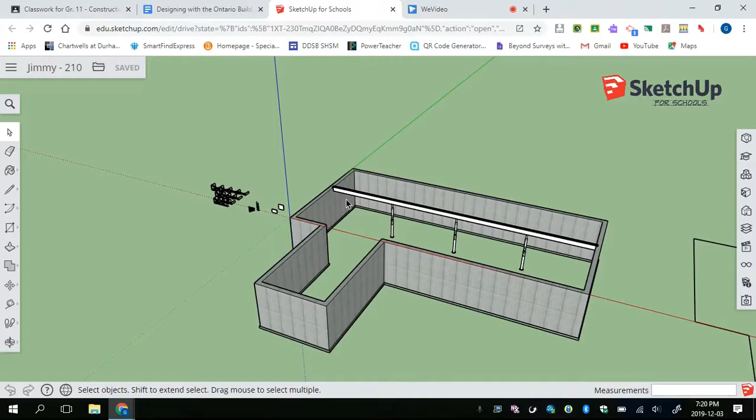We're back. So last time we were here, we did some mathing and some figuring out, and we got the first beam in here in the basement. It was quite a large one. We had 5 pieces of lumber that we had to put together to get our required strength, and then of course we put some posts underneath it so it didn't fall in. So that was a good job, us.

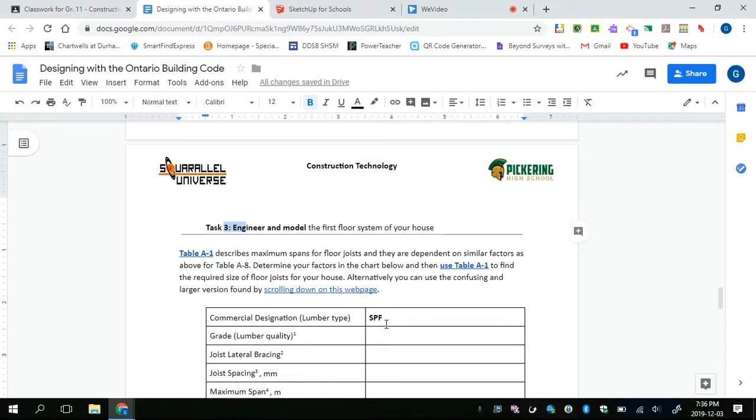The very last thing we did was we put a pocket into the foundation wall, so those beams had something to rest on. Now what we have to focus on is putting a first floor in here. So this task 3 is all about engineering and modeling the first floor in your house. So we're going to fill in this chart similar to how we did in this chart above. And we are going to figure out what size joists and all the good stuff about that.

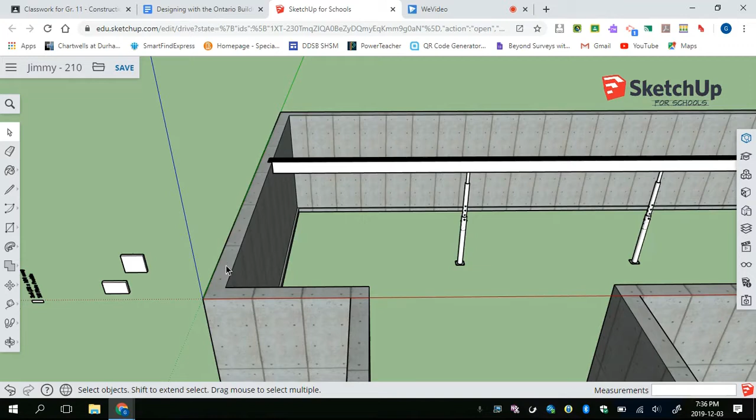Before we do any of that, we need something to put our floor joists on. We can't just set them directly on this concrete. That would be a lot of work and a lot of fastening that we just don't want to do. So we use something called a sill plate, and the sill goes along the edge of all the foundations, and then that makes an easy connection between your floor joists and the foundation. So I have prepared one earlier. Ta-da! It says so right there.

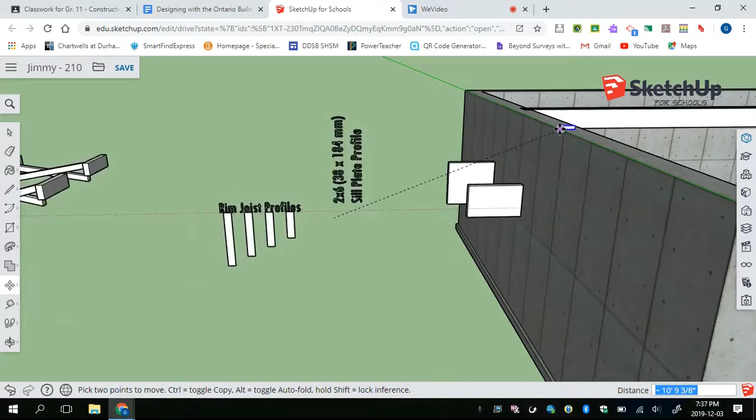And what we're going to do is we're going to take this shape and run it all the way around the edge. So I'm going to just hit the M key to get the move command. Now, if you remember when we drew the outline of this house, we made a couple of copies. And that's what we're going to take advantage of right now. So I'm going to go find my other copies. Yours could be behind or in front, wherever you put them. You should know. And I'm going to put this over on my other copy that I made right there. So it is aligned on the left edge with this shape.

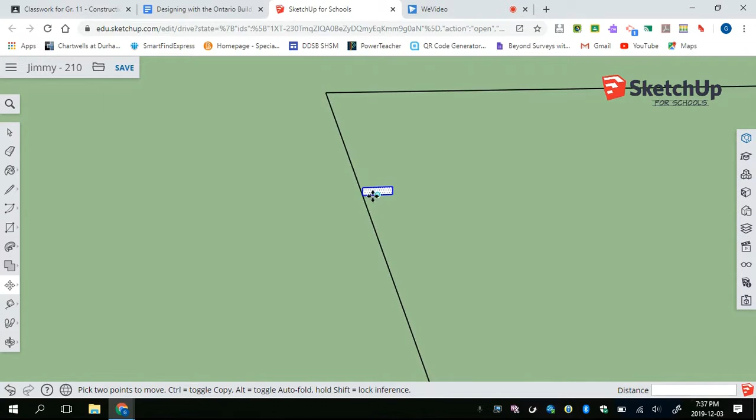Now we're going to use the Follow Me tool. So make sure you have it selected, which is under the push pull tool, and ready to go. So again, the way we're going to do this, we already have this one not as a group. It's in an empty shape, so we can use that. We are going to right click on this, explode it, and now these lines are not a group, but they are all highlighted. We can simply click our tool and click and whammo.

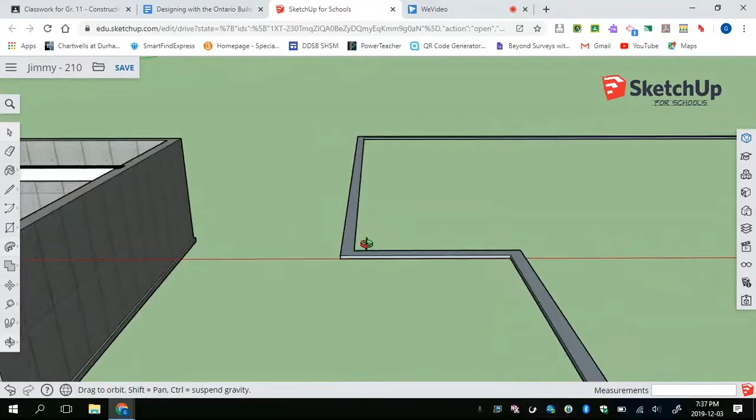Now, this one looks a little different because it's gray, and that just means, well, it's a long story, but if you triple click and then right click, you can reverse the faces. SketchUp uses different shading for different faces, whether it's the front or the back, and apparently it extruded and gave me the back face, so we can just flip that around. Anyways, there we are. We have our sill plate. In real life, of course, this would be multiple pieces cut up and installed, but for us, it's real quick and slick. So we want to make this a group so we can't screw it up easily.

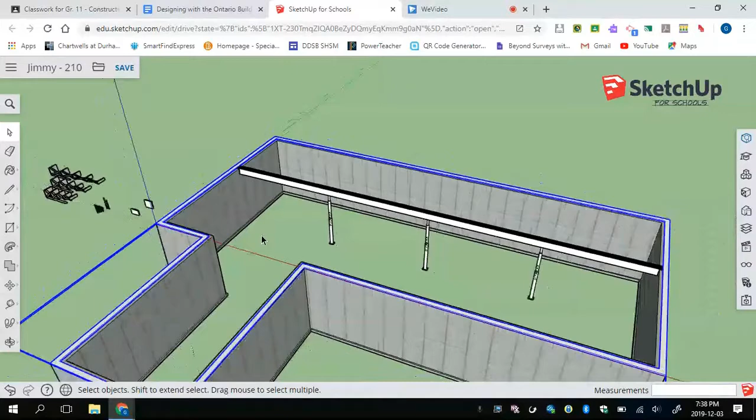We're going to triple click, and then we're going to make a group, and then we're going to put it back on our foundation. So with the move tool, you have to choose somewhere that's going to make sense. I'm going to choose the bottom corner over here, zoom out, and simply bring it right over there. Okay, and now that lines up with all the edges. And there is your sill plate. Congratulations. Give yourself a round of applause, pat on the back, etc. Take a musical break because I've just spotted an issue we're going to have to fix.

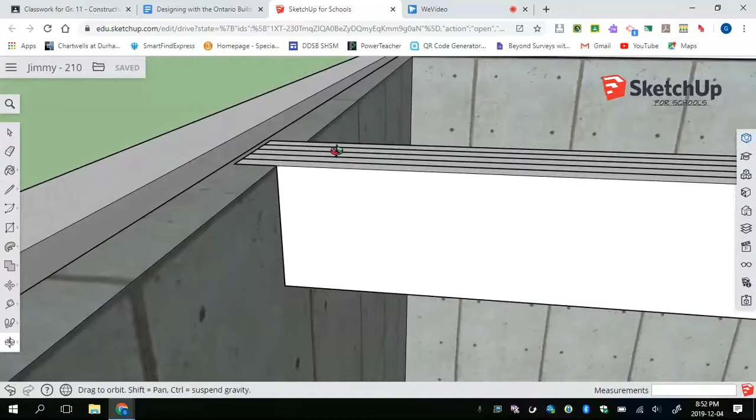Well, changing it now is a lot easier than were this a real actual thing. Here's the issue we're going to have. Our floor joists will sit on this newly minted sill plate, and they, of course, will go from the front of the house to this beam, and likely another floor joist will carry on from there. Unfortunately, currently, the top of this beam is not at the same height as our sill plate, so we should fix that. It's going to be relatively simple to do. What we're going to do, I'll give you an overview here.

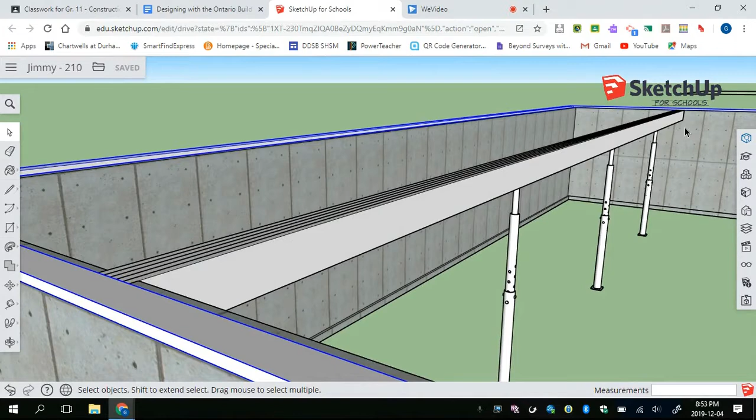We are going to lift that beam up. We will have to lift then these posts up as well, and then that pocket that we made in the foundation, we're just going to have to pull the bottom up to meet it, and everything should be hunky-dory. Record time. Here we go. Let's pick all of the beams.

Now, you may have been playing around a bit and figured out there's a couple ways to select things. Number 1, you can click on something, and that's great. And if you want to click on something else, you can press and hold the Shift, and you'll see beside the mouse that plus or minus comes on and off, and you can click something else. The reason it's plus or minus is that if you click the same thing again, it will unselect

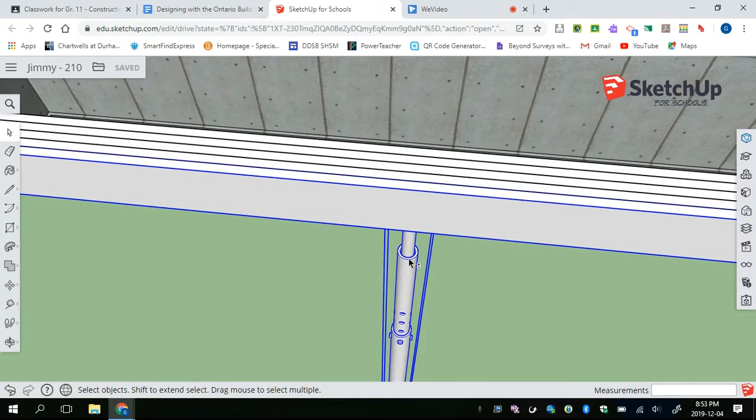it. The other option you have is to actually press and hold Control, and you'll notice it's only the plus. So no matter how many times you click on the same thing, you can't unselect it. The other way you can do it is by using something called a selection window, which is left-clicking and dragging a window, and that will select it. There are 2 different ways to do it, similar to many other programs.

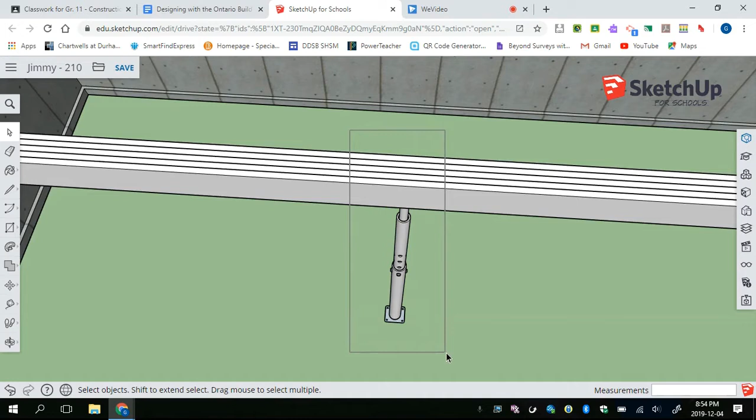If you start in the top left and drag to the bottom right, you will get a window that only selects things that are fully encapsulated by that window. On the other hand, in a situation like this, I don't want to have to click a bunch of times to select all these. I'm going to use a selection window up and to the right, and you'll see that that window is now dashed, and anything that is partially touched by that window will be selected.

So again, if I went top left down to the right, it won't select anything here because there's nothing in the selection window that is fully selected. However, if I come from the bottom up, it will select that. Of course, if you go from the bottom up and you just touch the foundation, it's also going to select that. There we go. We have those beams. Now I'm going to hold Control and select that post and that post and that post. So I've got everything that I want to move selected currently.

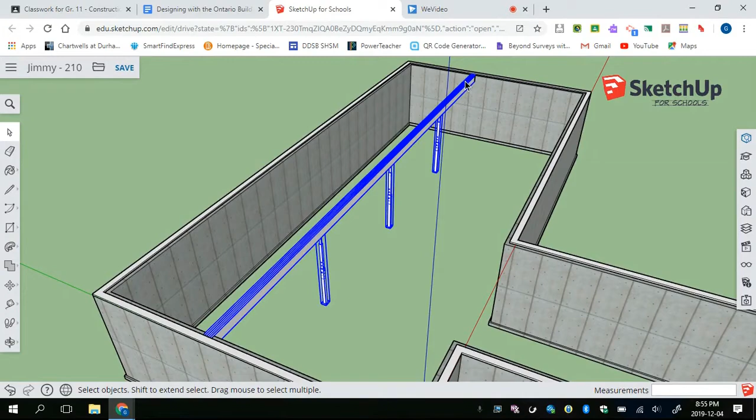What I'm going to do is make everything flush from the top of this beam to the top of the sill. In order to do that, we have to think about what we're going to do. I'm going to select this beam in this top corner and then start moving in the blue axis, hold Shift, and then click somewhere on this face. Here we go. So M for move, click once, start moving it up, and you'll see that it says it's moving on the blue axis, and that's definitely where I want to move it. So I'm going to hold Shift, and now it can only move in the blue axis.

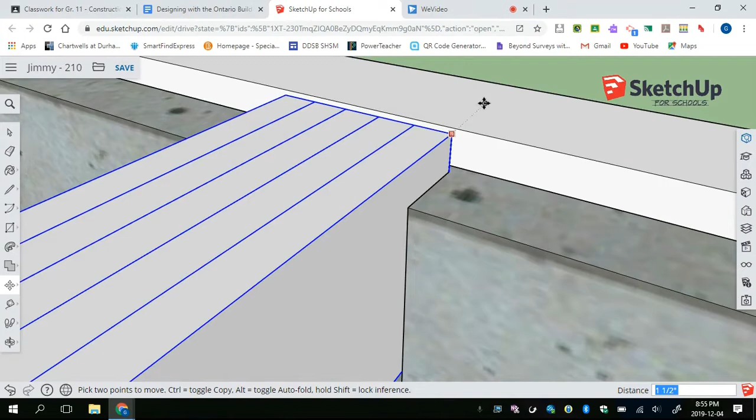And you notice anytime I click anywhere over here or have my mouse over there, it's locked to where that's going to be. And that is indeed where I want to click again. And now that is set. Okay, so that's there. I'm going to fix two things because I don't like what I'm seeing here. Number one, I'm going to go in and edit this foundation pocket. And you'll notice that there's this weird gap here.

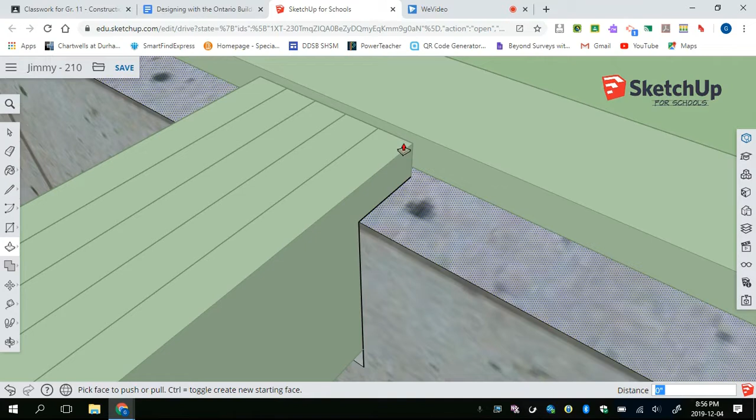I don't like that. So I'm going to click the push-pull tool, which is hidden behind the follow me tool. Alternatively, you can just press P, and I'm going to highlight the face. You can't see that it's highlighted, but trust me, it is. You'll see if I move over, it's going to select the top. So I'm going to select this face, push it back, and I'm going to click on the inside face of the sill. And now, if we look real close, you'll notice that that pocket has moved, which is great.

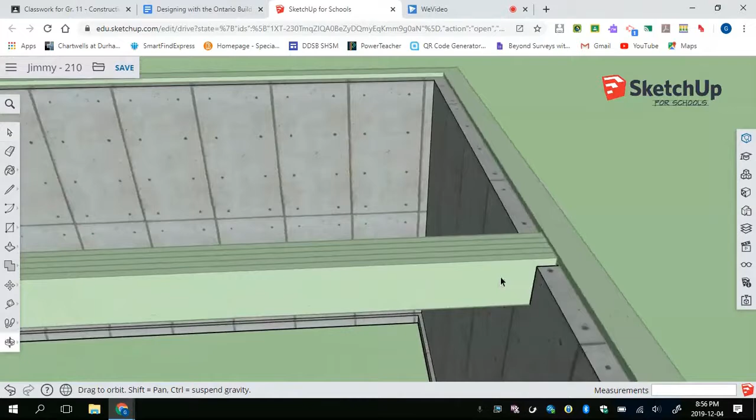And then, of course, because we moved everything up, I'm going to click this face and move it upwards. I only want to go, of course, to the bottom. So I'm going to rotate around till I can see the bottom, click somewhere there, and that is that. The other thing we should do probably is do the same thing to the other side.

So here we are. I'm going to hit P to get that tool, click somewhere here, and move it back to this face. That did not work out. Let's do that one more time. Click, go there, and then there you go. It has to recognize that you're going to click on that face. That looks wonderful. And now I'm going to click on this bottom face and move it up to there.

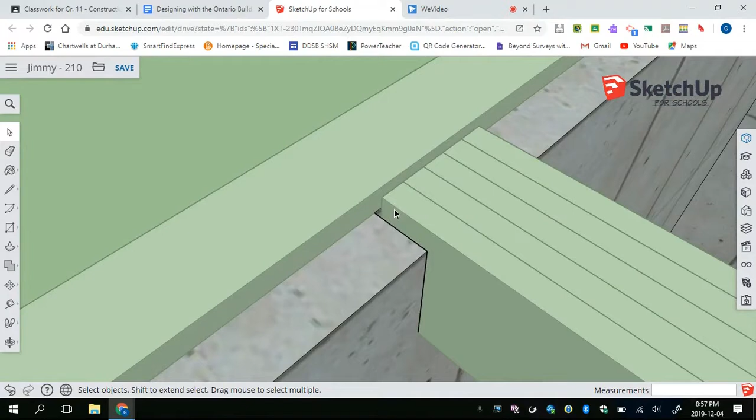So that's wonderful. However, now I have to move all these things. So I'm going to click out of that group. And again, I'm going to use the selection tool to get all those guys, and I'm going to move all of them. So press M, click on that. Make sure I'm going in the right axis. Hold Shift and click under there. So that's making a nice connection.

And now, of course, I have to make it longer. So I'm going to come around this side. And these are components again, so whatever you do to one, it will do to all of them. I'm going to double click on one of them, so now I'm editing it. Hit P and pull that across to the edge there. And that is it. You can click anywhere to get out of that. And now our beam looks like where I thought we were starting.

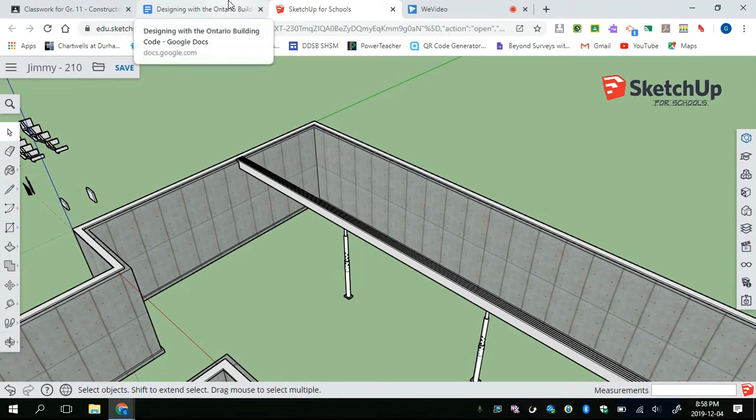Yay. All right. This is where now we have to actually figure out what size our floor joists are. We've started from the ground up. We got this beam in based on a whole bunch of things. And now we have to figure out what size floor joists we need for this particular situation. And yours is going to be different, but I'll show you the way this one works out. This is talking about the first floor and a different table. We're going to use table A1, and if you click on that, it should take you to the table.

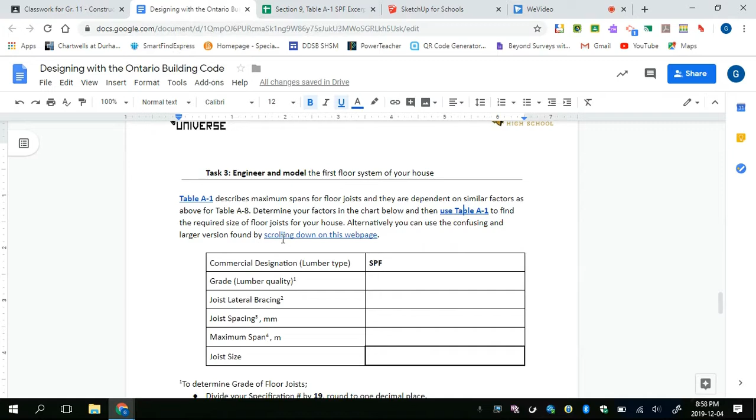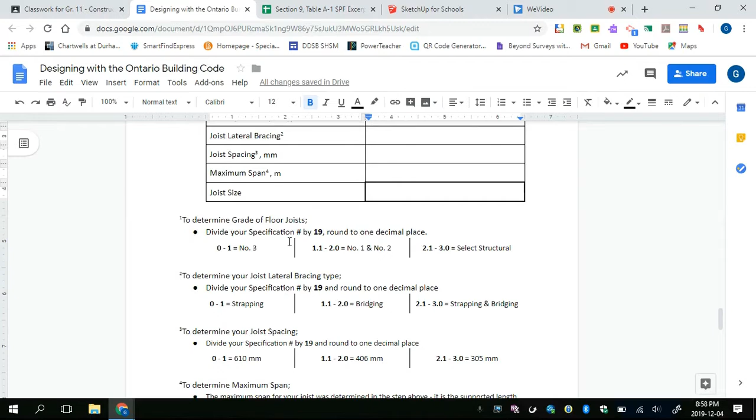And it looks similar to the other one, but there's a couple different sections, and everything is based on 3 options, which we're going to go through right now. So you're given that it's SPF, and the rest of these you have to figure out. I'm going to make up my specification number, which I'm going to say is 55, which is the biggest one. So if your number is 55, congratulations, we're going to do the math for you. The first thing you're going to do is figure out which grade you're using, which can be different from the beam that we did earlier.

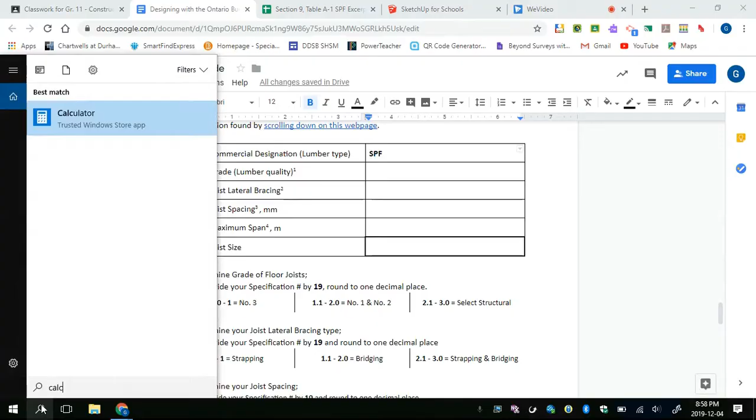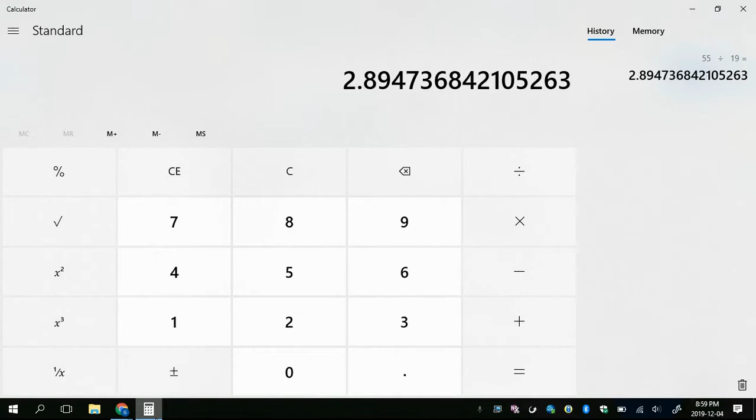So I'm going to pull up my calculator here, and I'm going to take 55, and I think it says divide it by 19. Divide it by 19 equals 2.89. So I'm going to write that down somewhere so I don't forget. 2.89. That's not a measurement, that's just my number. And here we go, 2.89. This says that my lumber grade is here. I am in the select structural group. So I'm going to type that in. Select structural.

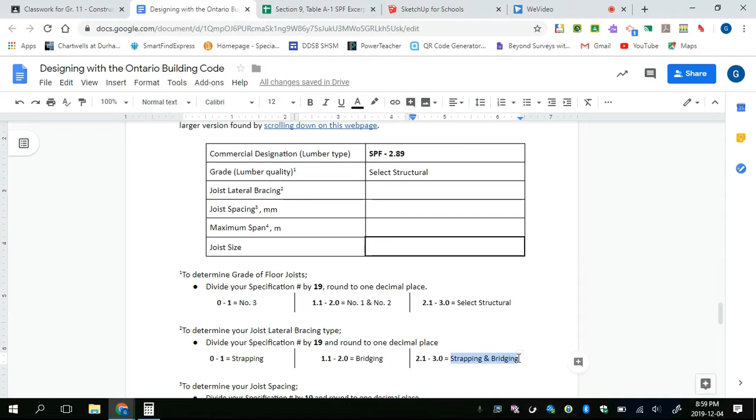And now this other one is about bracing. Now, the bracing changes, and there's a couple different ways we can do it, and they're all sitting over here waiting for you: you have this cross bracing, which is called bridging. There's strapping, which is down here, which we'll talk about in a minute. And then there's a situation where you will use both of these at once. So let's find out what I am dealing with. My number is the same, so it puts me in here, which is strapping and bridging. And I don't want to type, so I'm just going to copy paste. Fantastic. It's centered, but who cares?

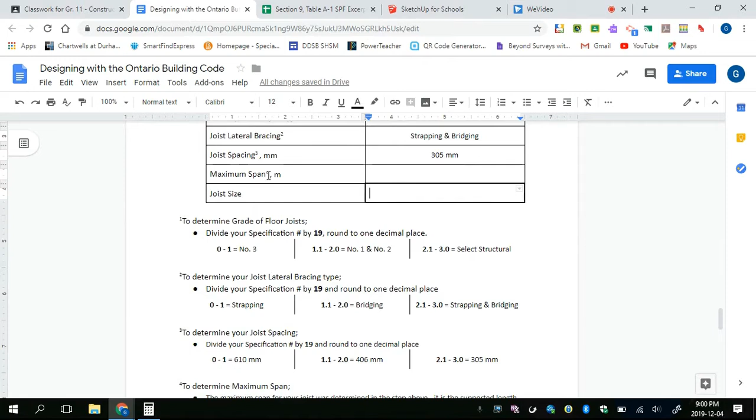Finally, we got to figure out what joist spacing, how far apart all the pieces of wood are. And it turns out it's the same thing divided by 19. So the spacing for me is 305 millimeters, which is something in imperial, but who knows? The last thing that I do before we can figure out what joist size we have is figure out what the maximum span is. To determine that, it turns out we've already figured it out. It was the supported length from task 2 up here. So the supported length I don't have written down, which is awesome. So I'm going to make one up.

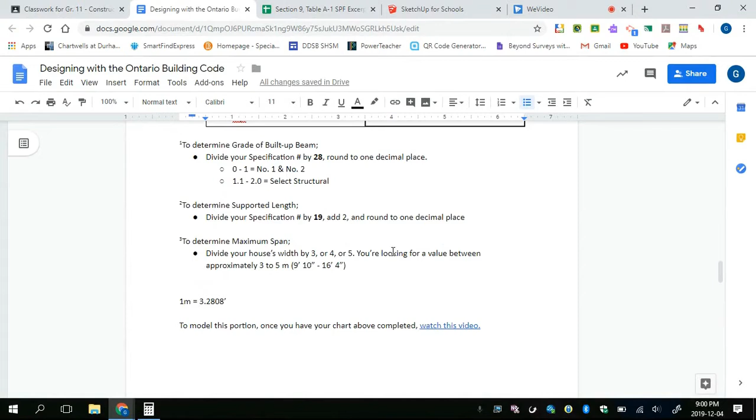Actually, I think it was 4.1 meters. I could be wrong, but that's what I'm going with. 4.1 meters. So I will type that in right here. 4.1 meters. And of course, you will have this written down already from something else. So we have all the things we need, and now we can go figure out what our joist size is.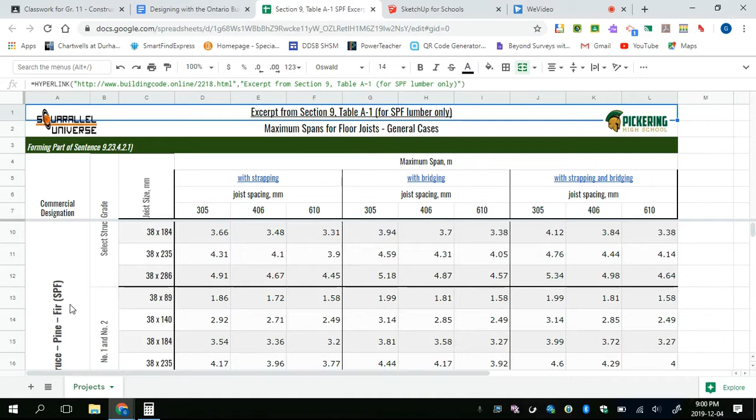So let's look at our chart. Here we are. Moving from the left, we have SPF. That's great. Got to figure out which grade we are. I remember we were select structural, so we will be somewhere in this part of the chart at the top third. If we go back into here, this tells us we have strapping and bridging. So that puts us not in there, but rather over here on the right. So we're going to be now between J, K and L. And our joist spacing is 305 millimeters, which puts us into this column.

So we're in J. And finally, the number we're looking for to support the span that we have for these joists is 4.1 meters. So I'm going to live right here. That's it. So 4.1 is below this, which is great. I could do this one down here, but that's going to be overkill. So this is what I'm shooting for. And all you're going to do once you figure out which box you are, go all the way to the left, follow to the left. And this is our joist size, 38 by 184. And again, we have joist strapping and bridging and 305 spacing.

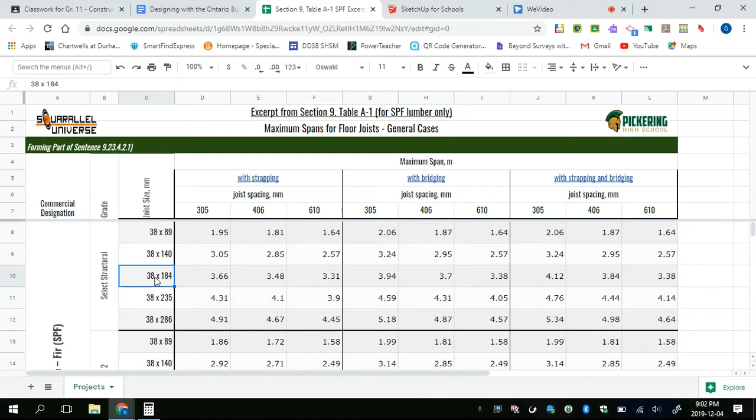So with all that in mind, I'm just going to Control C and go back in here and Control V. There's all my information to draw. So first, let's find the joist size. It is under the entity info. It's not that one. It is this one. It's a 2x8, 38 by 184. Just double check that I got that right. I did. And it has strapping and bridging. So we're going to use both these things. And you'll notice these are grouped and they say what they are. And this is 2x8, which is what that is. And the spacing is correct at 305.

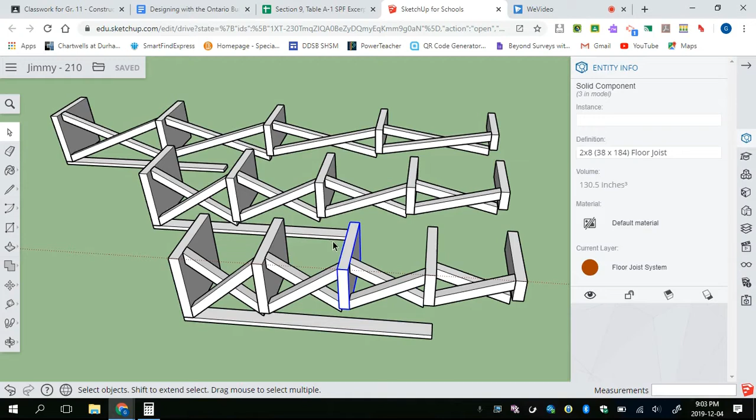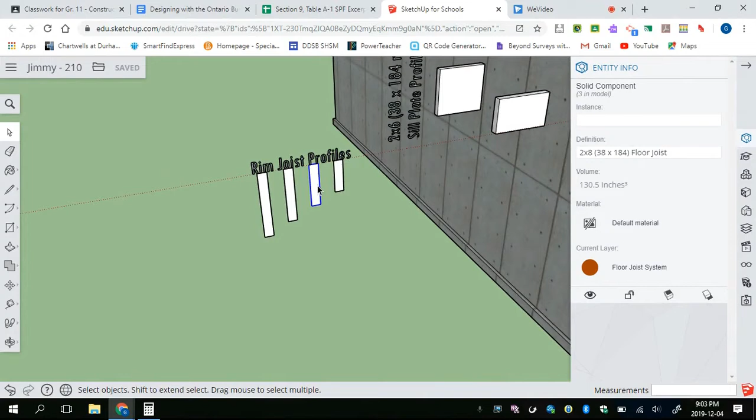You'll notice that there's these little guys sitting here. This is something called the rim joist, and our floor joists are going to sit on the sill plate that we talked about earlier. However, they need something on the end to fasten to, and that is, you got it, something called the rim joist. So this one here is 38 by 184. So I'm going to use that one.

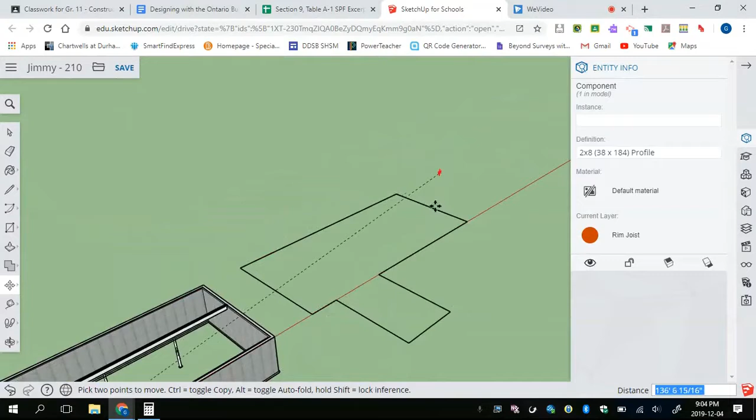And again, I'm going to use the follow me tool, which you probably guessed, on the final outline that we have. So to make this easier, I'm going to bring this over here, put it there, and I'm going to grab my profile and move it. And again, I know where I'm going to put it. It's got to go on top of everything. So I'm going to grab the bottom, move it along, and plop it anywhere I want over here on that line. So one last time, get your follow me tool and then get rid of it, oddly, but that's just how it works.

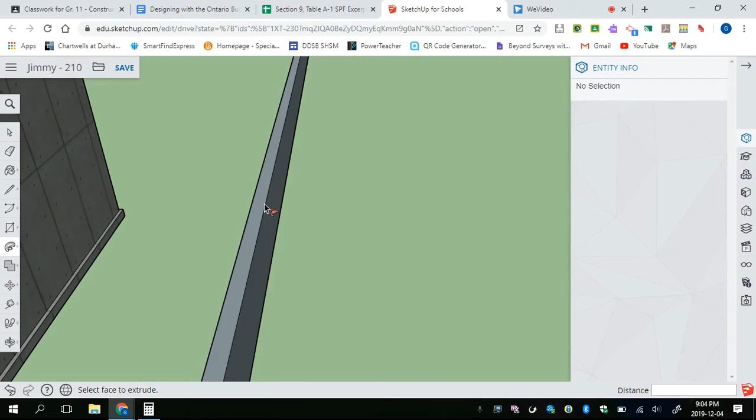This is a group in this case. It's not separate like it was for the sill plate. So I'm going to right click and explode. I'm going to right click the outline and explode, and everything's highlighted, but it's not a group. So everything's going to be peachy keen. Grab that tool, hit it once, and voila. Again, I've got the rear faces apparently. So triple click and reverse the faces and right click and make a group. So now I can grab this from this corner or whichever corner you like. And I'm going to dump it on top of here where it belongs, which is right lined up there. So now it's starting to come together.

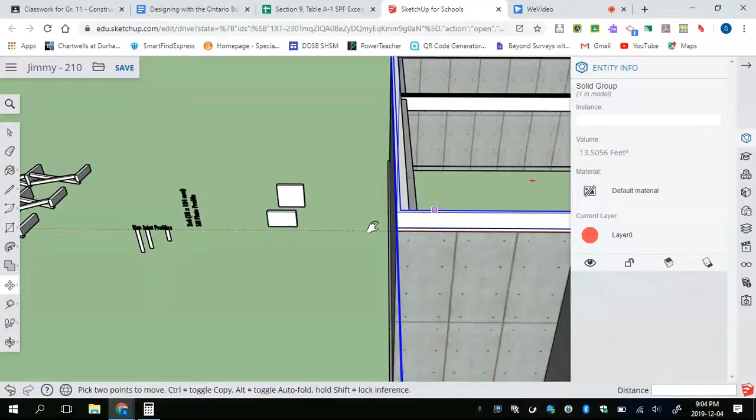We have our sill plate, we have a rim joist that sits on that, and now we can start filling in our joists. So I'm going to grab that joist, which is this guy. Nope, it's this guy. That's good. I'm going to get rid of this, and I'm going to grab this, and I'm going to grab this, and I'm going to go install the first one.

I think what I'm going to do is take it from this edge, and that'll become clear why in a minute, and pull it way over. I'm going to start in this corner, which is where we're going to start. And I'm going to select that anywhere here. It doesn't really matter. And what this does is set the right height. So the reason I've selected it there is I wanted to put it flush to the top here. I have my strapping down here, and I have my floor joist.

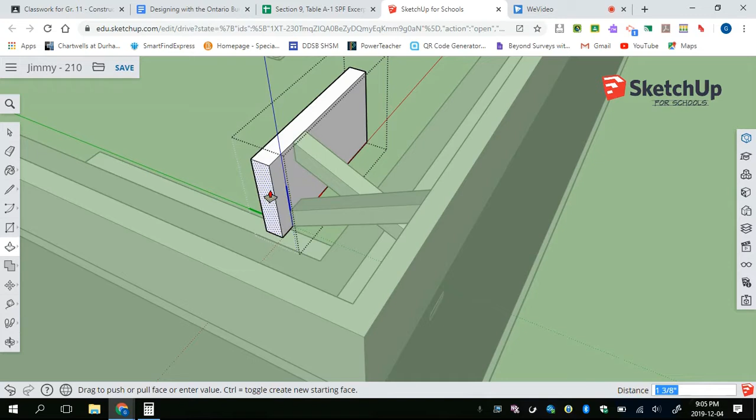So let's do this. First thing I'm going to do is double click on this, and I'm going to get the push pull tool by pressing P, and I'm going to pull this into this face. Now, when you have the push pull, it can only extrude in the direction that the face is going. So it's kind of like holding shift, but you don't have to. I'm going to go way over here and just click on that point because that is where I want it to end. And then I'm going to pull it to the middle of our beams.

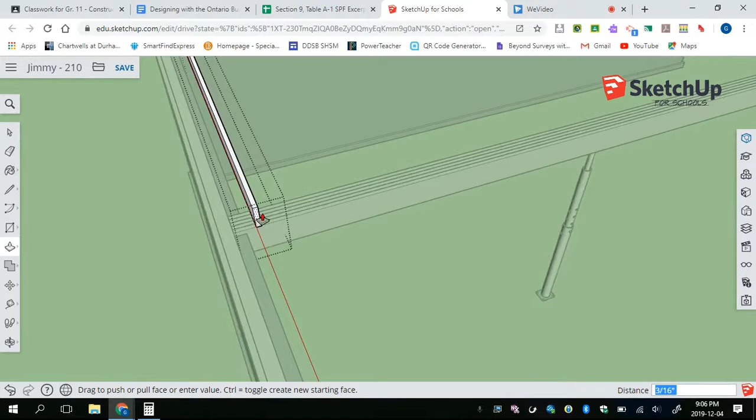So grab it there, and well, you know what, just for our purposes, how about there? We're not going to draw the whole thing. We're only going to get a sense of this. I'm not going to continue that on. You know what? I'm lying. I'm going to continue this all the way through, which you should too if you can. And we're going to click it there and close it.

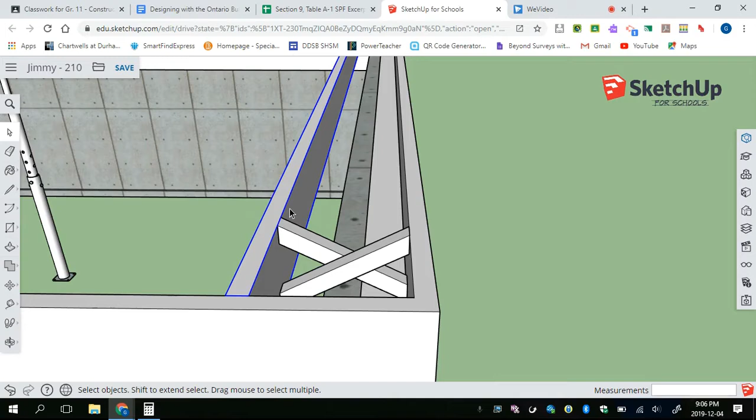So there's our first joist, except I'm kind of lying. I don't want this spacing that I've already got set. I actually want it 3/4 of an inch less. The reason for that is plywood. If we continue with this spacing, when we got plywood on, it's going to end on the inside edge, which we'll show you in a minute. So you know what? I'm going to leave it as such for now. Let's go with that. So there it is. We have our correct spacing.

I'm going to take this group of bridging, and I'm going to move it to the middle, which is going to be really difficult because I made this thing full length. I'm making my life difficult. So to do this, I'm just going to pull this back to the middle of my beam. There we go, close enough.

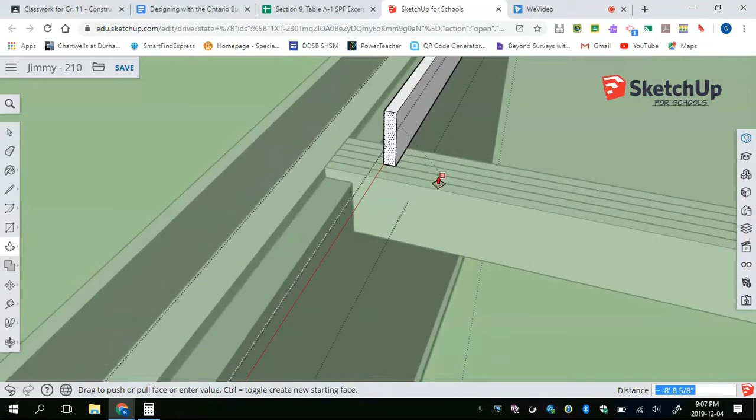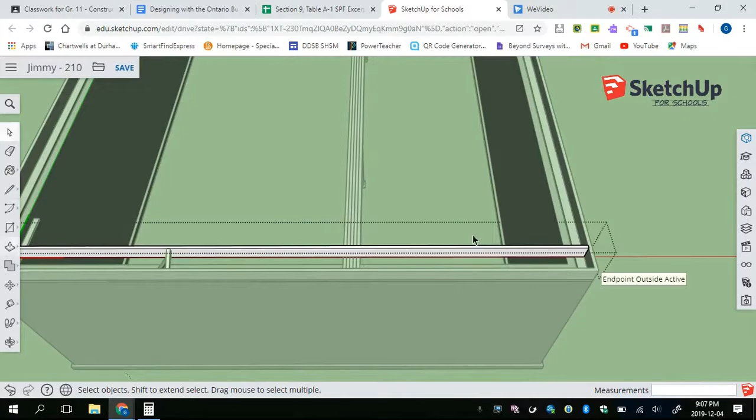And now what I can do when I get this bridging is I can grab this, and it will click to the middle. So if I move along here slowly, at some point it's going to say, hey, that's the midpoint. So that's where I want it. And now I'm going to go back and do this. Okay. So now we have the whole thing. So there's my floor joist with a bit of bridging. And now I need strapping, which also has to go to the middle. And strapping is just a flat piece of wood that gets connected to the bottom of the joists.

So this is kind of in the middle of nowhere right now. And I'm going to install in a couple steps. Number one, I'm going to grab the bottom in the middle, and I'm going to move it this way to line it up left to right. And I can just go to the, oh, I can't go to the middle because I just made it bigger. So get into the green axis, hold shift, and I will line it up maybe with that point. Fantastic. And then I need to move it up.

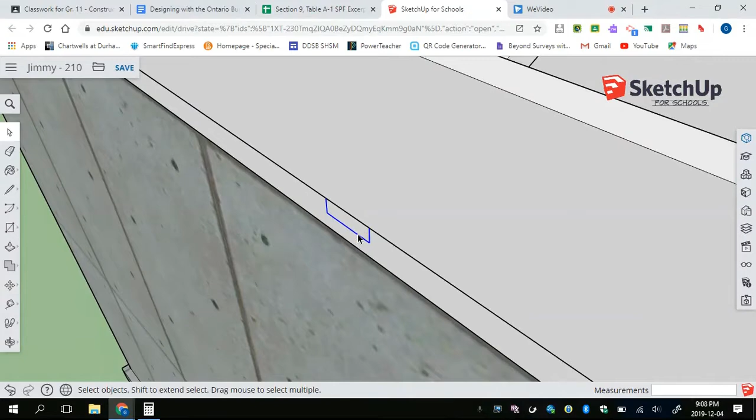So I'm going to grab the top of this, go up in the blue axis, and then click on this face. And there it is. Oops, sorry about that. And finally, you can see that it's sticking out way over to there. So I'm going to move this now left to right. I'm going to get it going the right direction, hold shift, and I'll bring it, sorry, let's get this again, shift to there. Okay, there's the beginning of my strapping.

So this joist in real life would be split here, and you get a second one going. For our purposes, don't worry about it. And now I'm going to make this longer because I'll need it all the way across. If I could select it, that is.

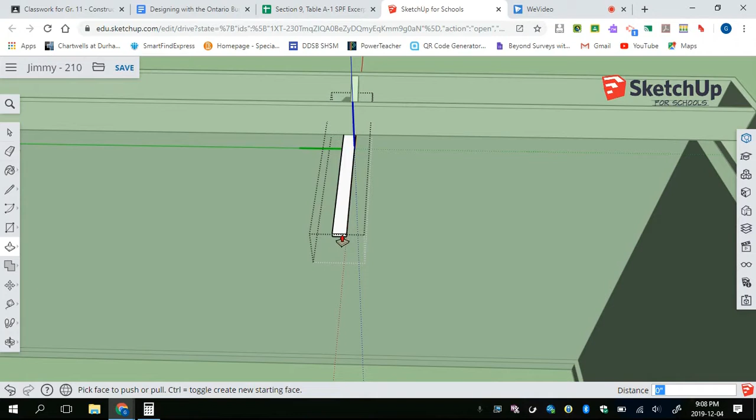And I'm going to pull it all the way over. Sorry if I'm making you dizzy. And let's go right to there. That's good. And then I can take my joist and my bridging, and I can move both of them at once. So what I will do again is click on this.

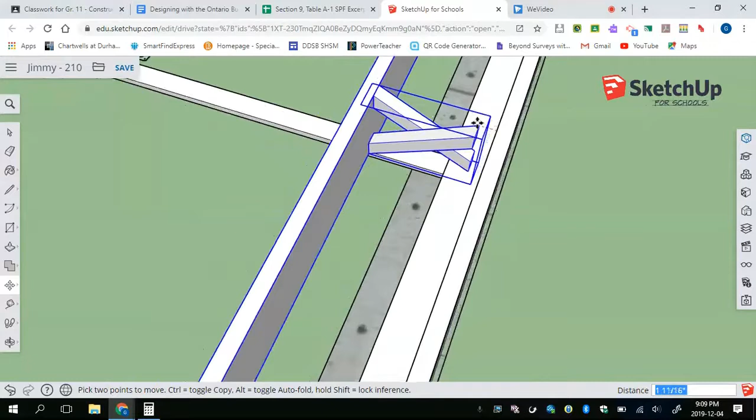So press M, click on that, start moving it. And of course, I want to keep that one there. So once I get going, I'll press Control, which will give me a copy. And I'm going to hold Shift to make sure I'm going in the right direction. And I can click on this face, which it is clicking on there, but I'm actually going to rotate around so I can see it, get in the red direction, hold Shift, and click on that face.

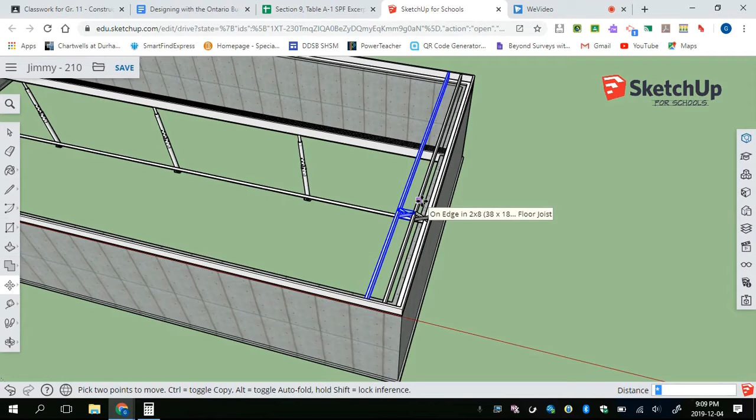So there it is. Now, if we haven't hit space or done anything, we can continue on our copy like we did when we made the outline. So what I'm going to do is hit Shift 8 to type in multiply by, and I'm going to type in, I don't know, 10. And there's that many, and I'm not there. So I'm going to now type in times 20, and I'm just making up numbers now. I need more, so I'll go 30 maybe.

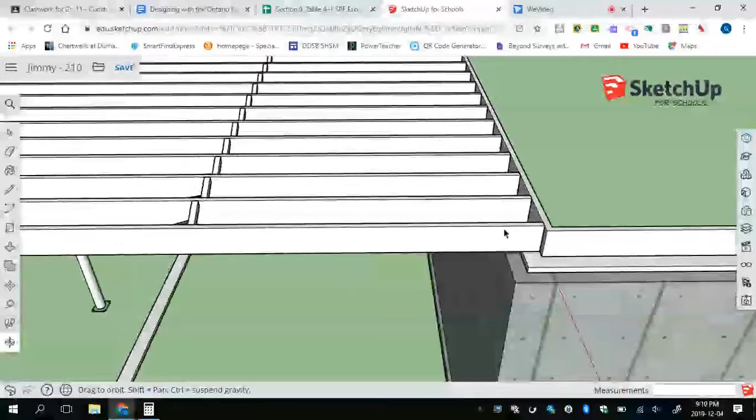Oh, that's really good. So I don't want to play with what's in here. And similarly, for your situation, you don't need to draw them all in. I just want you to get a sense of what they would look like. So here we are. There's a whole bunch of joists and a whole bunch of strapping and a whole bunch of bridging for that section.

That looks terrific. The next stage I want you to do, actually, you know what? That was a really good job, everybody. You've done great. I love the way your joists look. Take a break, and when we come back, we're going to install plywood and find out why this is all wrong and you have to change it, okay? We'll see you then.

It's not that I lied per se, it's just that, well, sometimes when you make a mistake, you remember stuff more, and let's just proceed as though we're still buddies, okay?

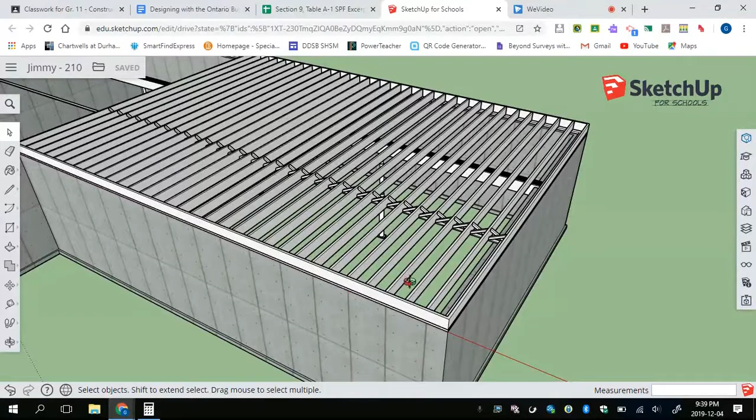Here's what we got to do. We have to install plywood on this floor because I don't know about you, but I don't want to be walking around on this floor as it sits currently. So we're going to draw a sheet of plywood. Now, sheets of plywood, as you may or may not understand, are 8 feet long by 4 feet wide. So what we're going to do is draw a rectangle that is 8 feet long and 4 feet wide, and then we're going to push pull and extrude that up 3/4 of an inch.

So R for rectangle. Let's start in this corner and pull it along here somewhere. And you'll see in the bottom corner, it's just guessing at a size. It says it's 5 foot by 2 foot 4 and 9/16, give or take. We want that to be 8 feet. So 8 feet, comma, 4 feet. And that should give us our piece of plywood.

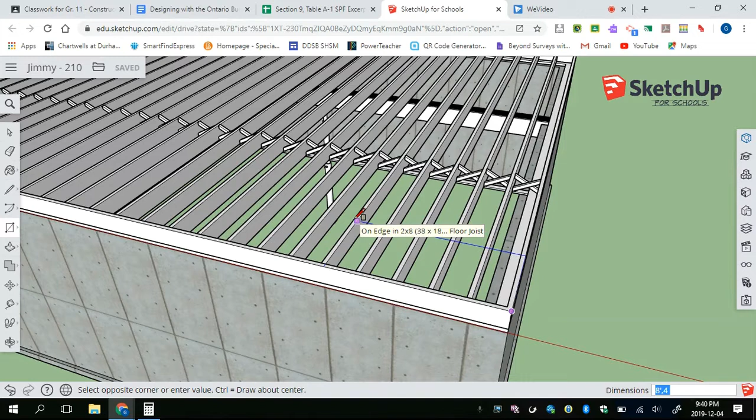We're going to press P and we're going to pull that up 3/4 of an inch. So 0.75. And there we are. And hit space. And now we're all set. And I'm going to make this a group so I don't change it too easily. There we are. There's our sheet of plywood. You can see it lines up nicely on that edge, and it lines up nicely on the front edge, and everything is just really handy dandy.

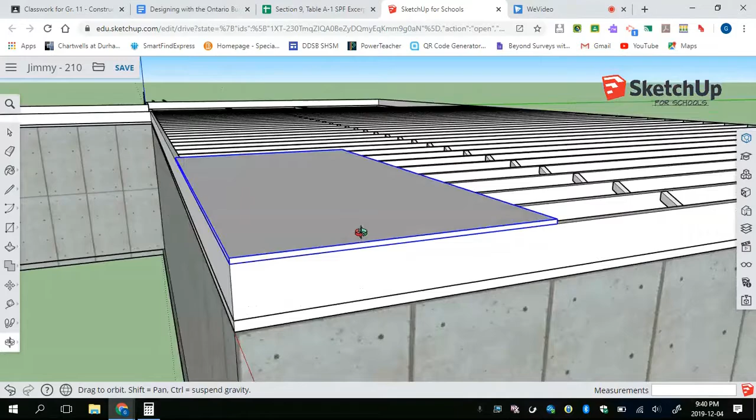However, if I turn this around, what you're going to see is that the plywood is, well, it's really not doing so hot over here. So let's pretend that you're hanging out with your buddies and someone steps right here. Okay? In fact, hold on a second. I'm going to get a buddy.

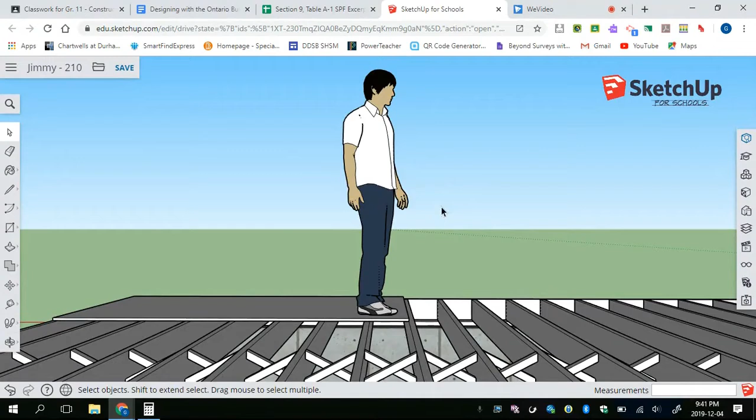So I got a buddy. Here he is. And turns out this guy's name is, well, it's People. So anyways, his name is People. Let's get rid of you. And when my buddy comes over and he stands right, oops, sorry about that. When he stands right at the edge here, you'll notice that this plywood, which is 8 feet long, which is standard, isn't physically reaching the edge of this joist.

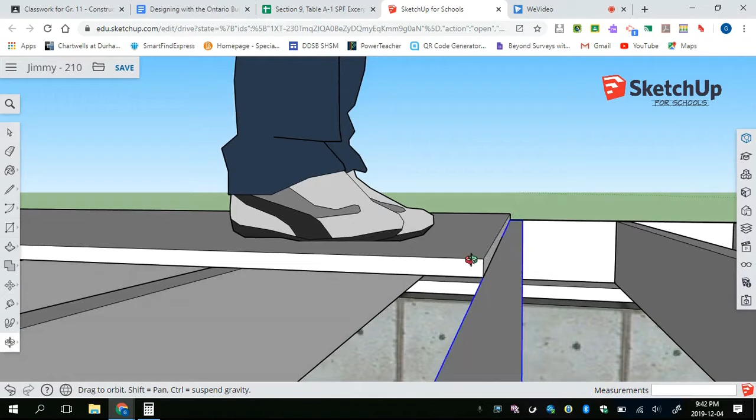So when he steps here, let's pretend this is a tile floor, all of a sudden there's a whole bunch of flex in this floor, and now your tiles crack or the mortar does. All kinds of bad stuff can happen. So this is generally not a good way to do it, to leave the joint between this and the next sheet of plywood unsupported. So it's currently not sitting on anything.

If you were working here and your boss said, hey, could you please screw in this flooring? When you went to go put a screw through here, there's literally nothing to fasten to. So this is just bad news bears. And that is why using this spacing at 305 millimeters right off the bat is a problem. You can't ever do that.

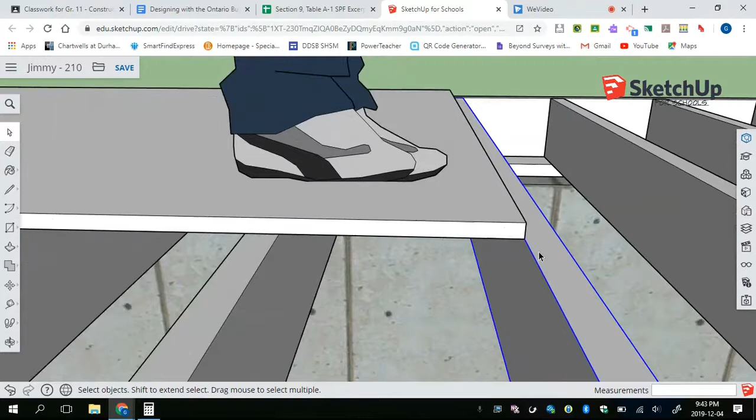So what we want to do is make sure that this sheet of plywood, we can't order different size plywood. That just doesn't happen. And we don't also want to cut the very first one. So here's the solution. We're going to move this guy over until it's in the middle. Seems easy enough. So here's what I'm going to do. I'm going to say goodbye to People. He's gone. And what we want to do is move all these joists over half their thickness. These guys are 1.5 inches thick, so we're going to move everything 3/4.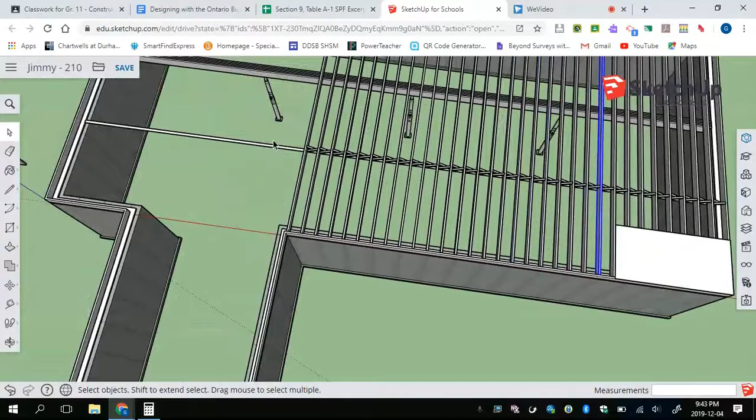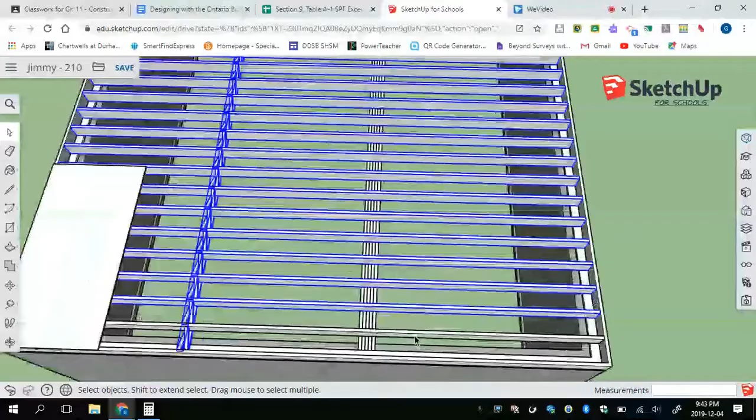And now what we have to do is select a whole bunch of stuff. So here's what I'm going to do. I'm going to select that guy. I'm going to zoom out, and I'm going to grab all my bridging right now. So I'm going to hold Control, and I'm going to select all of that. That looks great. And then I'm going to turn myself around some more, get to where I can see everything, hold Control again. And I'm going to start right here and drag upwards. And I've got all those. And finally, that guy. So again, hold Control and click it one more time. And that is everything that I've drawn, and that's going to work out for us.

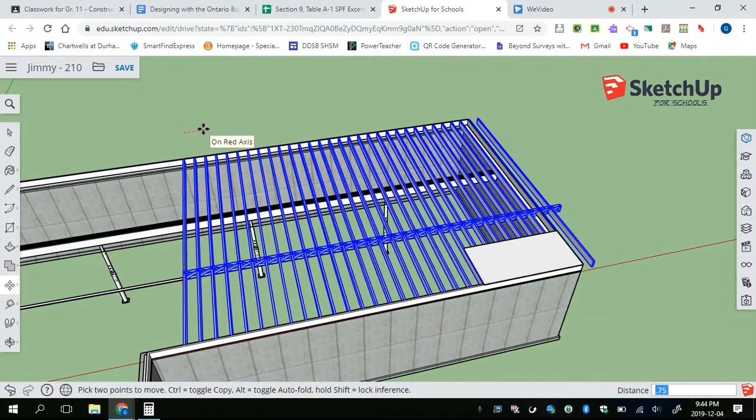So, oh, you know what? I'm lying. I don't want to move this strapping. So I'm going to hold Shift, not Control, and unselect that. And there we go. Press Move, click anywhere at this point, because we know all we're doing is going in the red direction by 0.75 inches. Enter, and all is well. Let's take a look. Oh, I already got rid of People. If People was standing here, People would be much happier with this plywood now because it is fully supported on a floor joist, okay? So that's it.

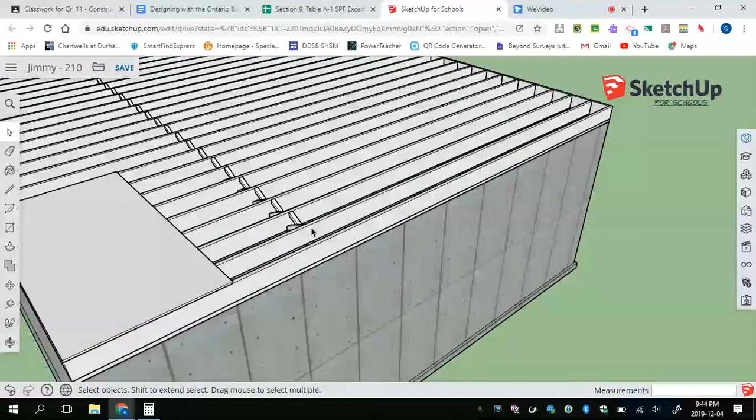Last thing I'm going to do, this obviously didn't go so well. And you know what? For our purposes, just getting rid of it. Don't tell anybody, okay? In real life, you would just cut that down to size, but that's just too much drawing for now. So here we are. We have a piece of plywood that's great. Let's put another one down. And there's no real hard and fast rule for this assignment about how many you have to put down, but I would put down a couple sheets of plywood.

So I'm going to take that over there and kabloomy. Of course, that's just 8 feet. We could have done that. And I want another one, so I'm going to hit Shift 8, which is multiplied by 2. And there's 2 more sheets of plywood. And oops, maybe times 3. Oh, I already pressed space. That's not going to work. Sorry about that. So I'm going to grab this, press M, and move it that way. Toggle Control, and just type in 8 feet. There it is. Now, the next thing we're going to do, I'm going to select these 4. This is like Lego.

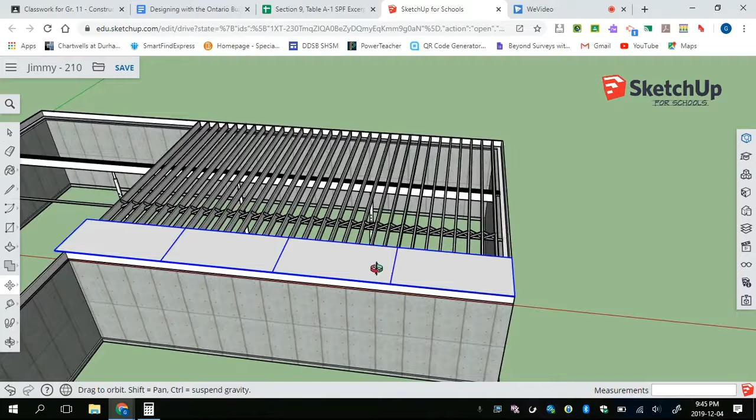So if you ever played with Lego, which you all know you did, what you will know is that if you built a wall and you put all the bricks on top of one another, this is the suckiest wall ever. Your cousins came over and destroyed it easily, and you got upset. It was a whole thing at Thanksgiving that everyone got upset about. So let's not do that. Let's make your wall/floor better.

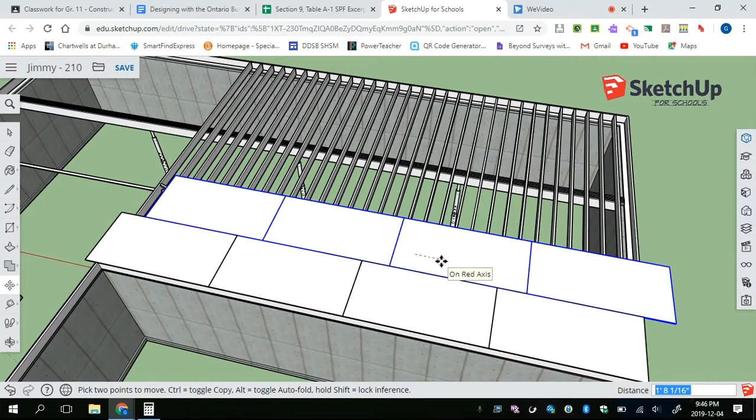And of course, what you're going to do is stagger these joints. And I'm going to stagger them by half, so 48 inches or 4 feet. So I'll type in 4 feet, and now they're staggered. This, of course, is a slight issue we've got going on over here. So I'm just going to delete it and draw a half sheet of plywood.

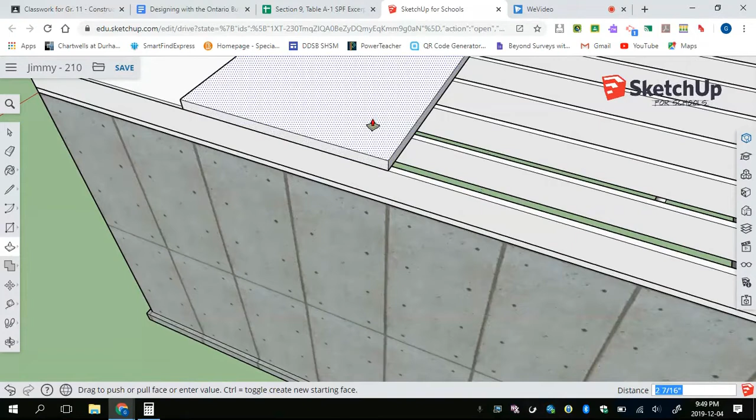So start in this corner, click there, and I'm going to go out to here, and I want it to be 4 feet by 4 feet. And then I will pull that up to 0.75 inches and make it a group. So now we have the beginnings of a plywood floor.

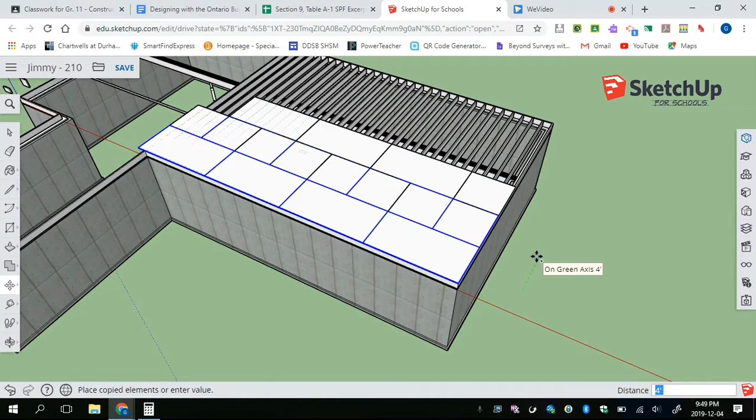And just because I can and it's easy, I'm going to select these and move them in this direction. Oh dear, I didn't get all of them. Press space, do it again. I'm going to move them all in that direction. I'm going to press Control for a copy, and it's 4 plus 4, which is 8 feet. There's some plywood. Look at that. Isn't that wonderful? There it is.

Now, let's just pause for a minute, and I want to talk about this in a bit of a more broad sense. So here's what's happened. Your parents are going away for the weekend, and they say, of course, hey, don't have a party. And you're like, obviously I would never do that. Meanwhile, you're messaging all your buddies. So everyone comes over, and you're having a great time. And then your house falls apart, and everyone is sad. And we don't really want that.

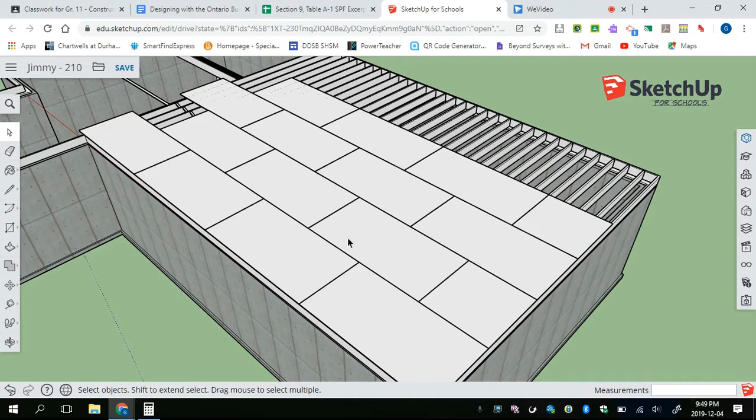So here's what's happened. We have just used the building code, which I have summarized in some of these tables. And based on the design of our houses, we have engineered this whole thing so your house doesn't collapse for your party. And here's what happens. When you have all the people, you know what? Hold on. I'm going to find all of the people.

So I found all the people. Turns out you've got a lot of people at your party. There's a guy walking a dog. There's some kids over here. This guy's legs are going through your floor. It's a whole thing. Anyways, here's your party that you're having, and no one's falling through.

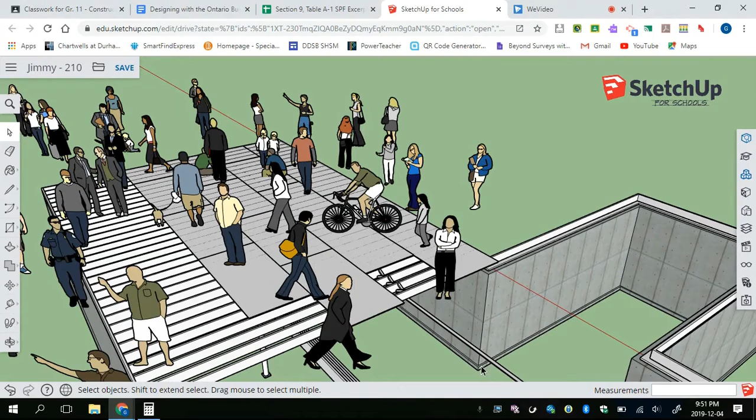And the reason is, when all these people are walking around and having a good time, their weight has to go somewhere. And at the end of the day, all of the weight on the roof that's not here, your furniture, everything goes down your walls through all this structure and into the bottom of your footing. And the way it does that is through all this stuff that we just drew.

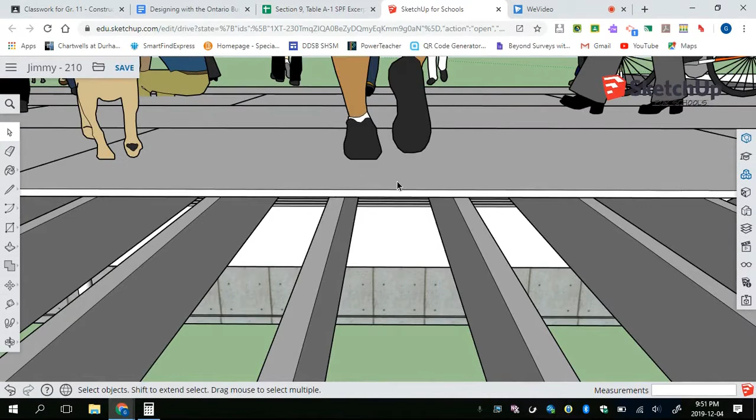For instance, when all these people are standing on here, their weight is supported by plywood. So this guy's foot right here, the dog walker, his next step isn't going to be on a joist. It's going to be on this plywood. But his weight still gets transferred across this plywood to all these joists and the neighboring joists.

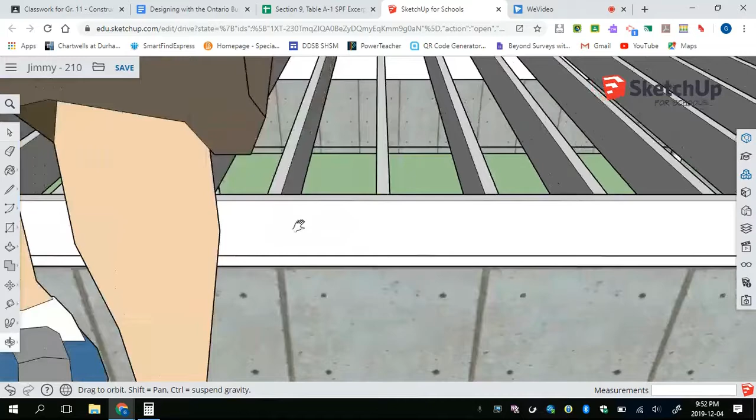That strapping, which is hiding in here, and the bridging connect all these joists so that they have to bounce together and move together, and it strengthens them so that this one can't bounce without this one as well. The strapping below means they can't move left to right, so they're solid in place. It makes it stronger still. Then, oh, we're in someone's legs. You've got this rim joist here. This thing is here so that these don't tip left to right at the ends.

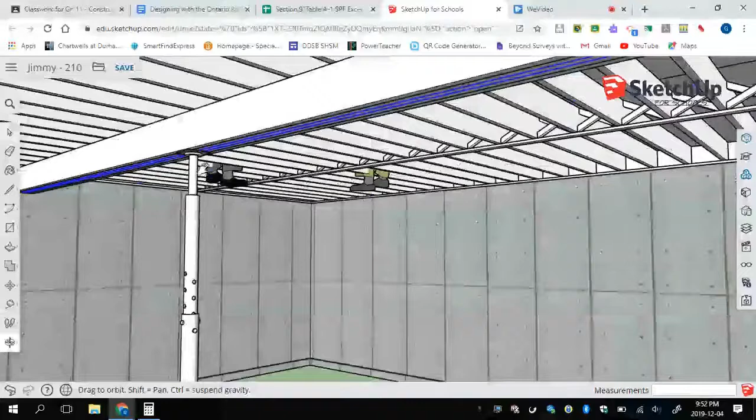Of course, all this weight from these people and this plywood and these floor joists has to go somewhere. It turns out it goes onto this beam. Now this beam has to be strong enough so that all this weight doesn't come through. So we engineered that and figured that out. And then, of course, all the weight from all that stuff goes across these beams and down through these posts. All the weight comes down, and there would actually be a foundation poured here as well, similar to these guys. So that is that.

The next and final thing we're going to do, oh my gosh, is put a front wall on here so you can just close the door and not all these people will show up to your party, okay? So that's going to be the next one: how do we draw a wall, what parts are there, and we'll go from there.